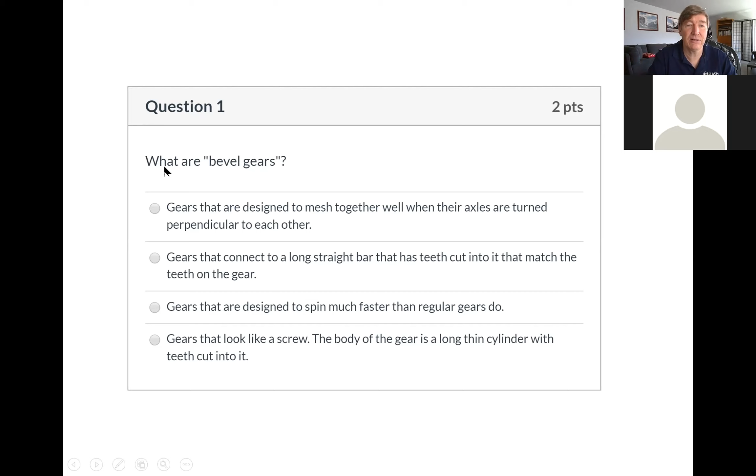Okay, so what are bevel gears? Well, hopefully you guys all remember what those are, because there's lots and lots of different types of gears. Bevel gears are the ones that look like this, so that the teeth are at an angle, so that when you take a bevel gear and mate it with another one that is turned 90 degrees, then the full teeth will contact the full teeth on this one. Because if you tried to do it using regular gears, it could work. I mean, you could have a regular gear that's like this and a regular gear like this, and they would work, but the teeth wouldn't interface completely. There would be only one little piece that would interface, and over time they would wear down very quickly. So bevel gears are definitely preferred to that. So I trust everybody got that one all right.

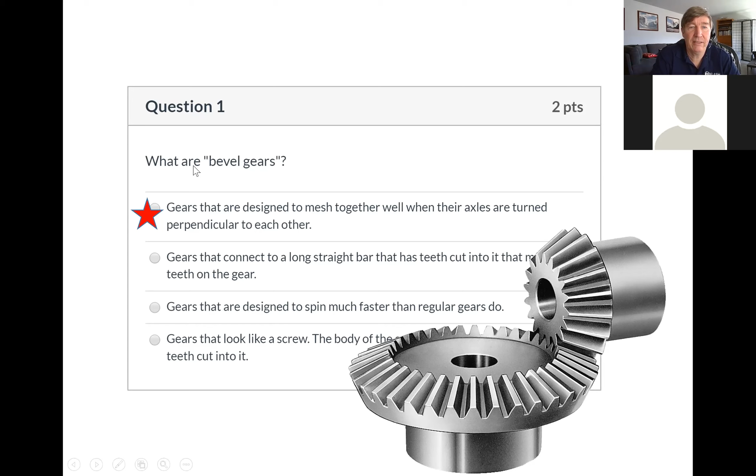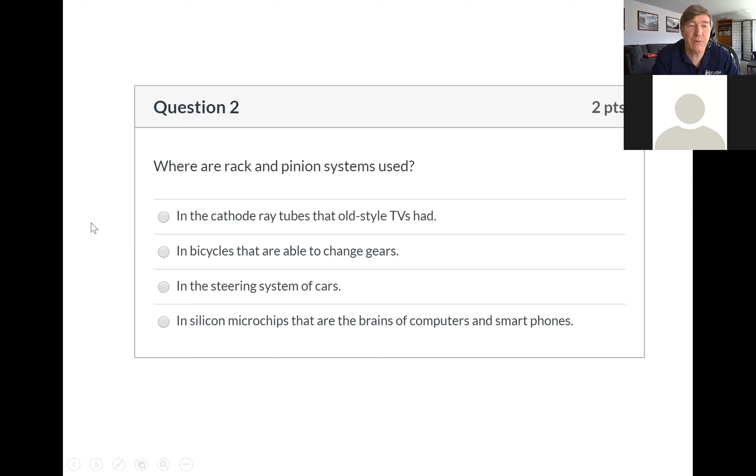Okay, rack and pinion. Okay, so I want you to think for a minute, what was a rack and pinion? Okay, hopefully you remember a rack and pinion is something that looks like this. Okay, so the rack is the bar that has teeth cut into it, and then the gear that interfaces with that is called a pinion gear.

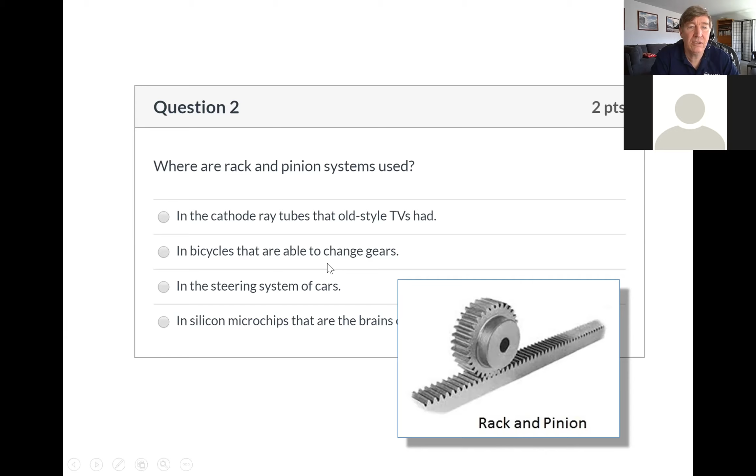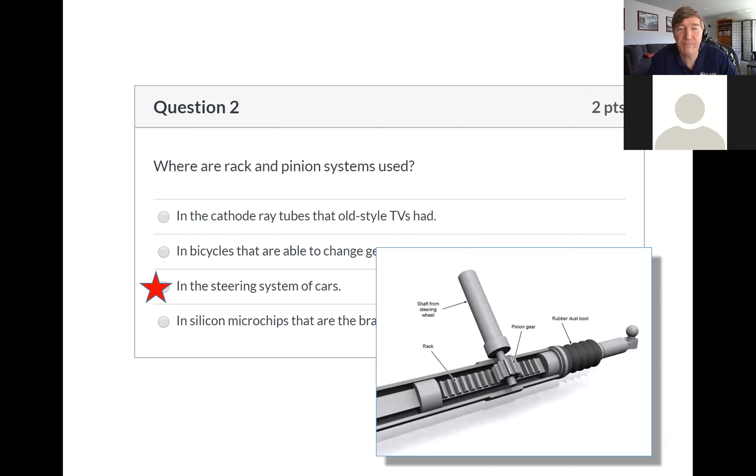Okay, so where are they used? Well, only one of them is applicable, and it's the steering for cars. And this is what a rack and pinion system looks like from an actual car. The first one that I gave you, this one up here, that's just a generic one. This is one that's designed specifically for cars. And this is how it works.

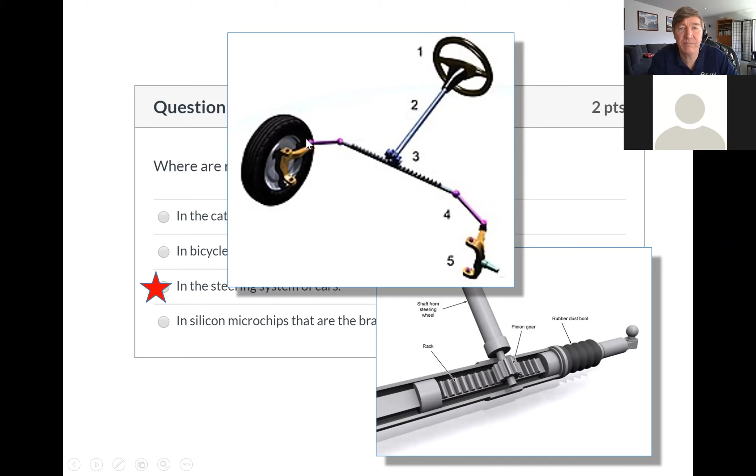Okay, so you've got the steering wheel, and then the shaft comes down, connected directly to the pinion gear. So when you turn the steering wheel, it pushes the rack, pushes it to the right or left, and that's connected to the wheels and causes the wheel to pivot. Okay, very efficient way of doing steering. Okay, what's the IMA of the gear train shown here?

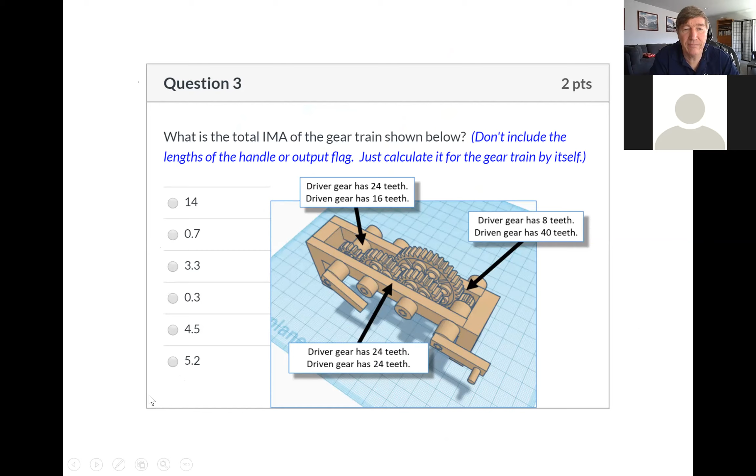Okay, so we got to remember how do you calculate IMA? The official definition we talked about before is the ratio of the two distances.

When we're defining DE and DR, if we were talking about a lever, it would be the distance from the pivot point to the place where the force acts. But you could also define it as the distance your hand moves divided by the distance the other thing moves. Danny is suggesting that the IMA is the inverse of what we had talked about before, because before we calculated the spin multiplier, but the force multiplier is the inverse of the spin multiplier.

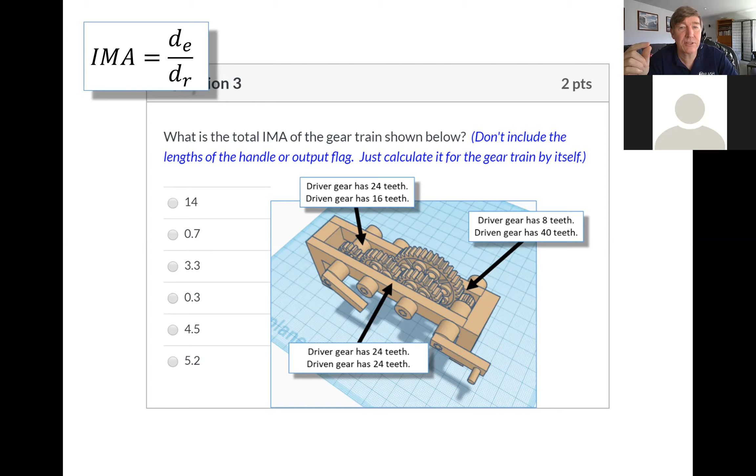What I recommend is that when we're talking about gears, instead of calculating the distances involved, calculate the number of turns. So focus your attention on just these two gears for right now.

This is the handle that we're going to spin. We want to ask ourselves, if this axle were to spin one full revolution, how many revolutions would the other axle turn? You can see on the driver axle, we have an 8-tooth gear. So one full revolution of the axle here is going to cause 8 teeth to move.

Now the driven gear over here is a much bigger gear, so 8 teeth on this guy is definitely not one full revolution, it's only a small fraction of a revolution. So if this guy is spinning one full revolution and this guy is spinning less, that's the same thing as if your hand is moving 5 feet but the thing you're trying to move only moves 1 foot.

That means your force is being multiplied. In this case it's the torque we're talking about, because this is gears and spinning. So the torque is going to be multiplied, meaning the torque on the second axle here is going to be greater than it was on the first axle. So now you know it's going to be the ratio of the teeth on one gear to the teeth on the other gear.

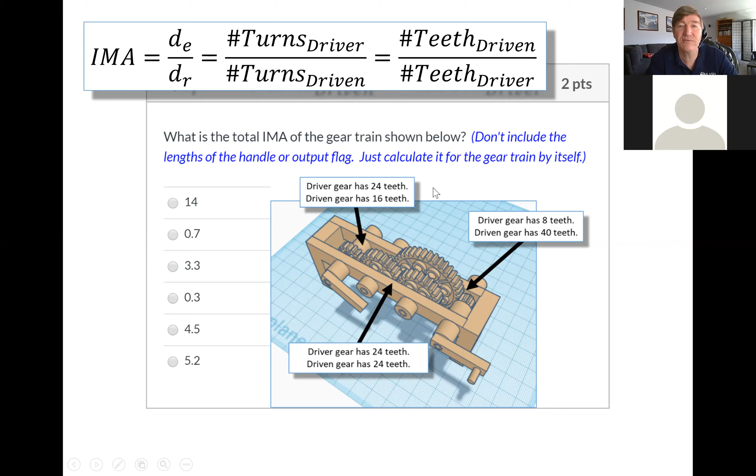So is it going to be the driven gear over the driver gear, or the driver gear over the driven gear? Well, since you know the torque is going to be multiplied, increased, just look at whichever gear has more teeth and divide by whichever has fewer teeth. In this case, the driven gear has 40, the driver has 8, so the ratio there is going to be 5. 40 over 8 is 5.

But that's just the ratio for that gear pair right there. Then we have to realize that this gear here is also on the same axle as that one. So this guy is no longer the driven gear, he is now the driver gear who is driving this gear. Now both of those gears have the same number of teeth, so the IMA for that one's going to be 1.

You might say, well why bother if it's only 1? Well, it serves a purpose, because sometimes the gears that you want to put here just don't fit. We wanted to put this tiny gear here, but if we tried that, maybe the axle would hit the big 40 gear. So the IMA for these two guys is going to be 1.

Now we look at the last pair. We've got a 24 tooth with a 16 tooth. So in that case, the driver gear is going to spin 1 full revolution, and the driven gear is going to spin more. So in this case, the IMA is going to be a number less than 1, not greater than 1.

So now that we know the IMA for each of the 3 pairs of gears, we just multiply them together to get the total IMA, and it works out to be 3.3. Danny is asking: 5 times 2/3 equals 10/3 for the IMA.

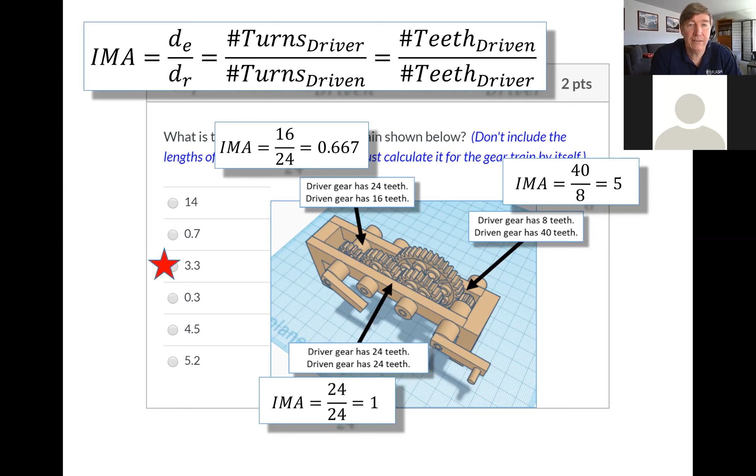Okay, question number 4 from the quiz, what's the IMA for this one? In this one, the simple machine is called a wedge. And again, the definition for IMA is always, you look at the distances. So what you want to do is take the distance that we move. If we push the thing vertically 9.1 inches, how far horizontally is that going to push? So all you have to do is take the ratio of the vertical distance over the horizontal distance, which is 9.1 divided by 10.8. It's always the distance you move divided by the distance the machine causes the object you're trying to move to travel. So in this case, our IMA works out to be a number less than 1.

So our force is not being increased by this machine. Our force is actually being decreased by this machine. But sometimes that's okay. Sometimes you're able to exert a very large vertical force, and all you want to do is redirect it, changing the direction of the force from vertical to horizontal. The fact that the output force from this machine is less than the input, a lot of times that's okay.

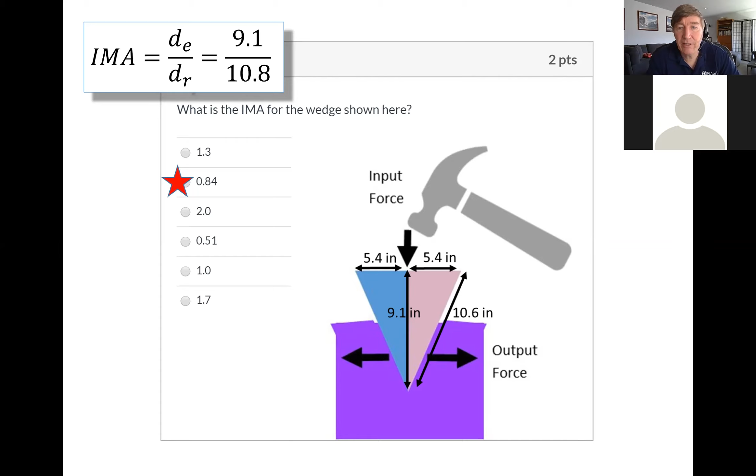Alright, I'm not seeing any more questions, so I'll keep on moving. Okay, the secret phrase, okay, we knew that one, mousetrap.

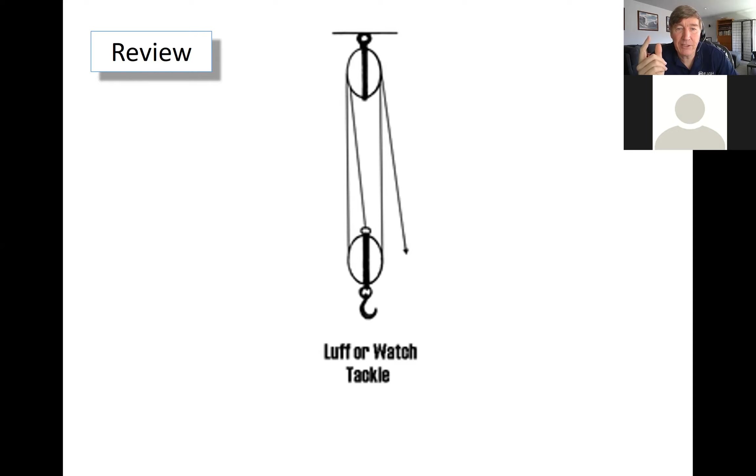Okay, so let's do a little bit more review here. Let me pick a couple other things. So here is a pulley system, and this is the exact same picture that I showed you before, but it wasn't the best picture. So what I did over the weekend was spend some time trying to find a picture that helps you understand better what's going on. So what you see now, this pulley system is the exact same pulley system as here. It's just that instead of looking at it from the side, now we've twisted it just a little bit so that you can get a better picture of what's going on.

Okay, so this is a block and tackle where the upper part here has 2 wheels that the ropes can go around, and the lower part only has 1 wheel. And in fact, I even found another picture that helps you understand better still. So this is a close-up view of the upper part of what I just showed you, and it's got all the names for it. Don't worry about it. If you were a sailor you'd need to know these names.

But for what we're going to do today, all you need to know is that this inner part here, this little roller, is where the rope is going to go. And in fact, here is an actual one. Now this guy only has 1 roller in it, whereas the thing you see on the screen has 2. So if you take the rope and put it over the roller and come down here, this is a simplified version of what you see in the picture.

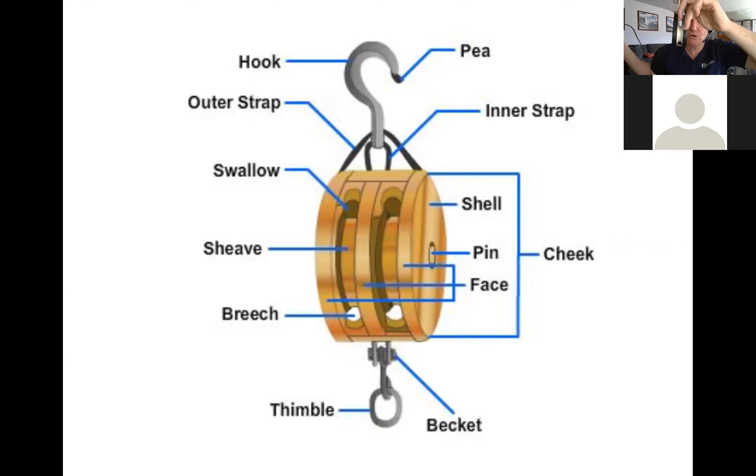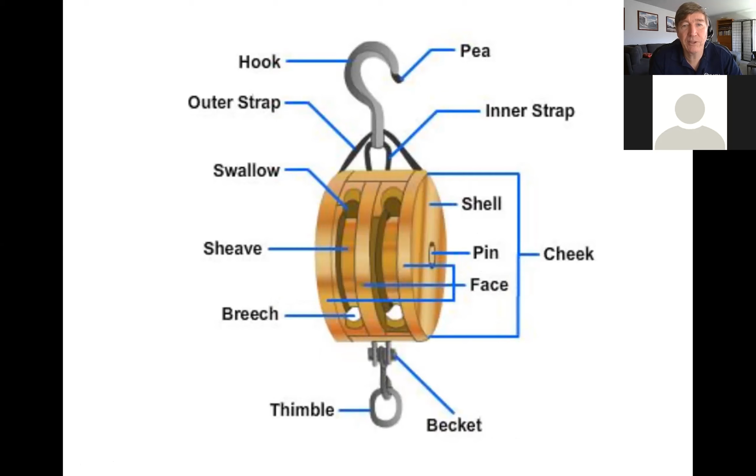So these rollers here are called sheaves. So the system that I showed you up here, this one where you've got 2 sheaves in the upper block and only 1 sheave in the lower block, now hopefully you understand a little bit better what's going on. So I want you guys to look at this and think, okay, what is the IMA of this block and tackle system, which, by the way, is called a luff tackle.

But again, that's just a trivia name. If you're a sailor, you need to know about this because sailors use this all the time, but I'm not going to require you to know this: a luff tackle.

Okay, so David is saying that the IMA is 3. Does anybody else want to chime in? Somebody agree with him, somebody disagree with him? I need at least one more response. Okay, so Van is agreeing with him, and in fact, I also agree with him.

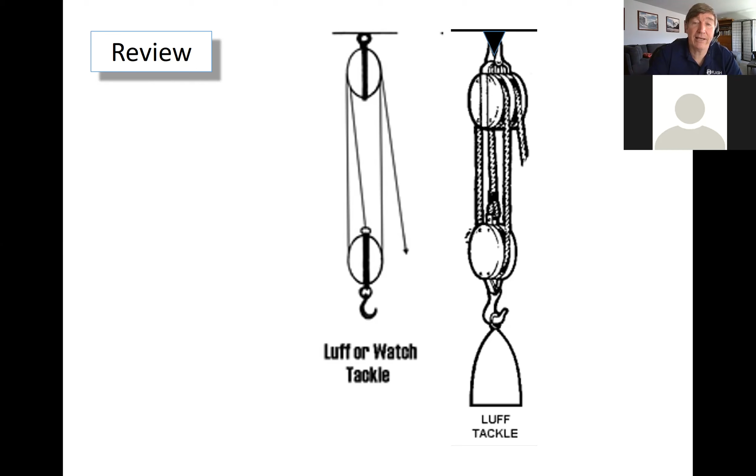Okay, so the IMA in this case is going to be 3, and the way that you know it—Danny's question is, how do you find it? Okay, I'm glad you asked. So the way you find it is you draw in your mind a little dotted box around the pulley that is attached to the weight that you're trying to lift.

So this what you see right here, that's the weight that we're trying to lift, and this is the block that's directly attached to that. And yes, David, you got it exactly right. Now all you do is just count the ropes.

Okay, so if you pull on a rope, we're going to make the assumption that the tension in the rope everywhere is the same. So if I pull on this part of the rope right here with a force of 10 pounds, we are going to assume that everywhere in the rope there is now a tension of 10 pounds. Now that assumption is only going to be true if our pulley system is completely frictionless.

But that's what IMA means, right? The I in IMA stands for ideal, which means frictionless. So if we pull with a force of 10 pounds, that puts a tension of 10 pounds everywhere in the rope, and we've wrapped the rope here so that we've got—can't count—we got three strands right here. Each one of those strands has a tension of 10 pounds in it.

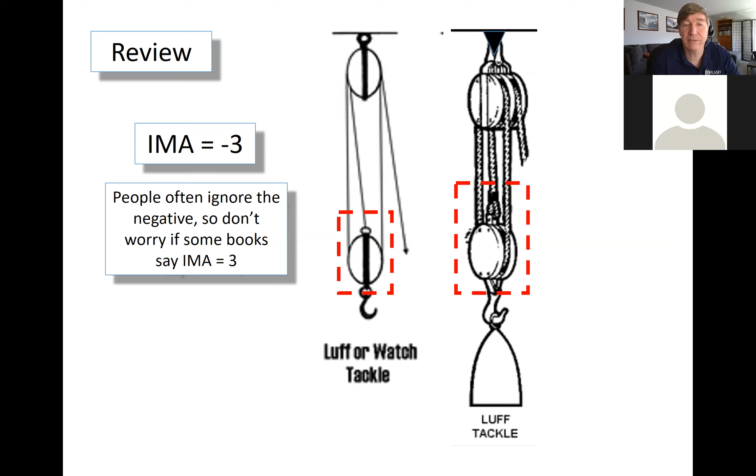Now here, what I've done is I've taken that exact same pulley system from before. So look on the right here—this is, we got two sheaves up here, one sheave down here. So it's the exact same physical pulley. What I've done is I've just flipped it upside down.

So the block here that only has one sheave in it, I've hooked it up to the ceiling, whereas before I had it hooked up to the weight. And then the block that has two sheaves in it, that's the one that I've now hooked up to the weight that I want to lift.

So if it's the exact same block and tackle system, and last time just a few seconds ago we calculated that the IMA of it was 3—if it's the exact same system, would the IMA not still be 3? I want you guys to think about it. What do you think, that the IMA is still 3, or maybe because we've hooked it up differently, the IMA might not be 3 anymore? So I need a couple people to type some in. How many of you vote that the IMA is still 3, and how many vote that it's different?

Okay, so I see one person is saying that it's 3, but looks like the majority of you are saying no, it's not 3 anymore, it's 4 now. Okay, and Sky is exactly right. Sky is saying if you use the box method, then you're going to find out that it's 4. So that's exactly what I'm going to do, what Sky suggested. I'm going to look at the block that is attached to the weight that we want to move, and I count the ropes, and I see that there's 4 ropes here, not 3. So the IMA is not going to be 3 anymore. The IMA is going to be 4.

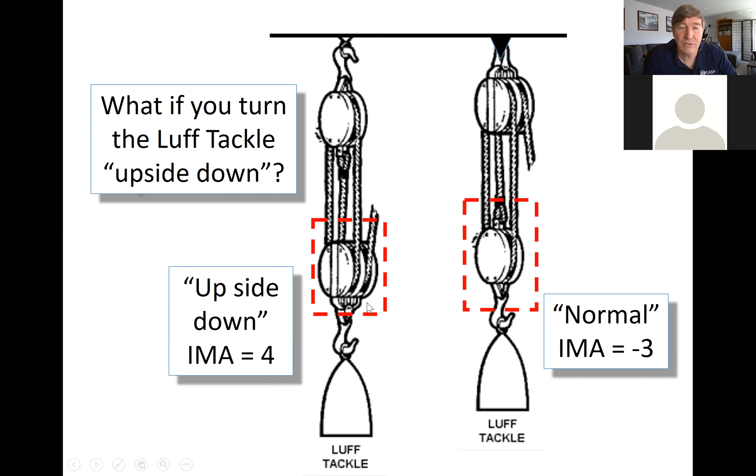So make sure you guys get good about how to calculate IMAs.

All right, now here is another pulley system, but this time my upper block has 3 sheaves, my lower block has 3 sheaves. Now, if you were a sailor, you would call this arrangement a threefold purchase, but you don't need to worry about that name. So use the dotted box method, count the ropes, and tell me what's the IMA of this pulley system.

Okay, so I see one person says 6, another one says -6. And so -6 is the more correct answer, but I would give you credit if you just said 6. Okay, so yes, the IMA for this case is going to be -6, but if you said 6, I'll give you credit, because most people don't worry too much about the direction, most people just worry about the magnitude of the IMA.

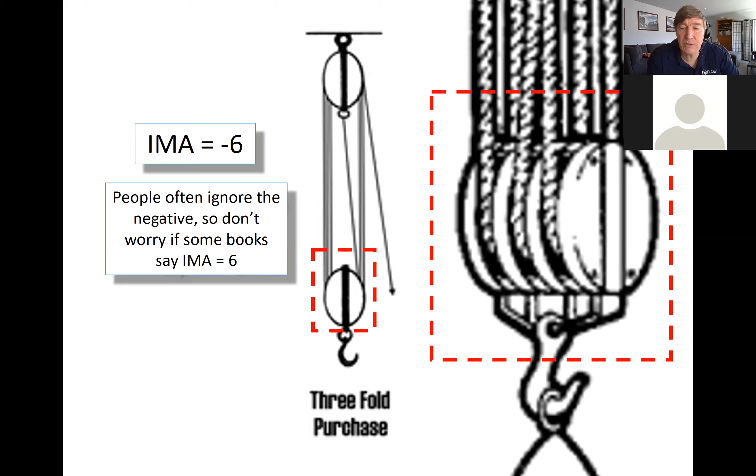Okay, so I'm trusting that you guys are now good with pulley systems. So let's move on to something else that might look like a pulley, but technically it's a different machine.

Anybody remember what the name of this particular simple machine is? I'll give you a minute to type something in. Well, yeah, I know, but this particular thing, okay, wheel, but you only got half of it, the other half is axle. This is when you take a wheel and an axle and you put them together, okay?

So what you do is the person working the machine, you grab onto these little handholds here, and you are going to pull the wheel, which has a large diameter. And this large diameter wheel is attached to an axle, which has a small diameter. So that allows you to pull up a heavy bucket full of water or whatever using a lot less force than you would have to if you just grabbed onto the rope and pulled it up.

So in this case with the wheel and axle, the IMA, if you look it up in books, some books will tell you to take the radius of the wheel divided by the radius of the axle, and other books say take the diameter of the wheel divided by the diameter of the axle. It's the same. And don't be surprised, some books say take the circumference of the wheel divided by the circumference of the axle. They all work out to be the same.

All right, so let's do an example like you might see in a quiz, wink wink, nudge nudge. Okay, so I've done diameters here. Okay, good, I see you're way ahead of me, I'm glad to see that. Okay, so the diameter of the wheel is 36 inches, the diameter of the axle is only 12.

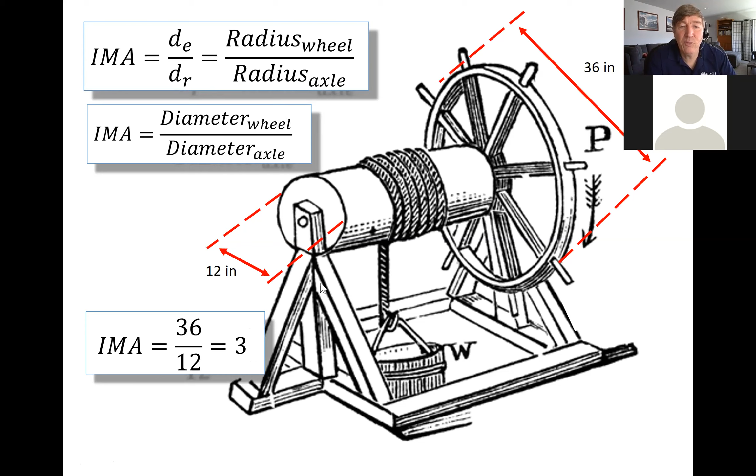So just take the ratio of those two, and that means the IMA of this particular machine is 3. So if we had a really big bucket with a lot of water in it, let's say it weighed 100 pounds, and we tried to pull the rope by hand straight up, that's more than we want to do. Hook it up to our wheel and axle, and we can lift that 100 pounds of water using a force of only 33 1/3 pounds.

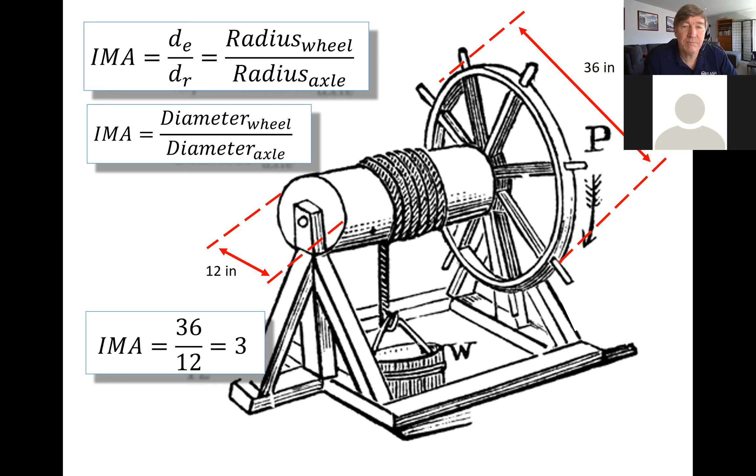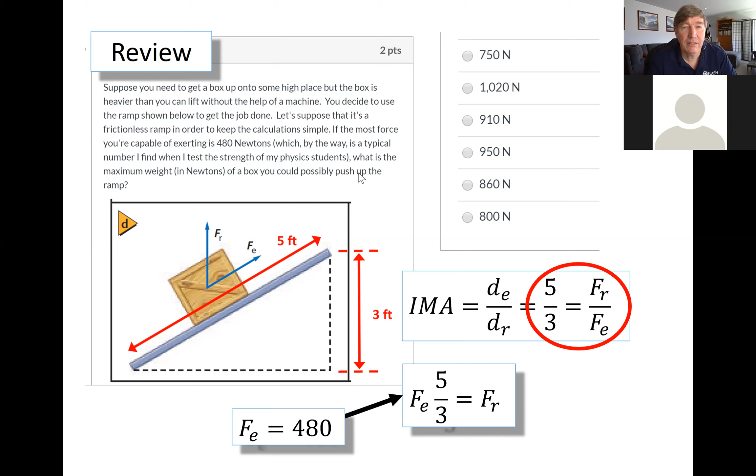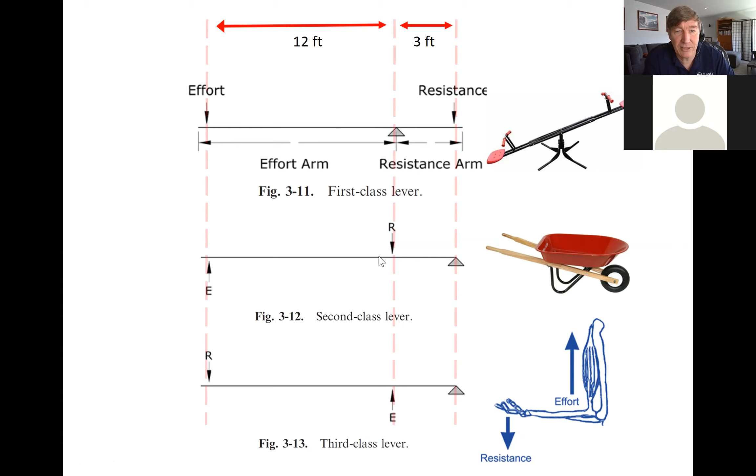Now, levers. Most people are pretty comfortable with levers, but you have to be careful because first-class levers and second-class levers behave a little differently. So let's suppose I give you a quiz here where I've defined these distances: this distance here is 12 feet, this distance here is 3 feet. Most people have no trouble if it's a first class lever. Remember first class, second class, third class.

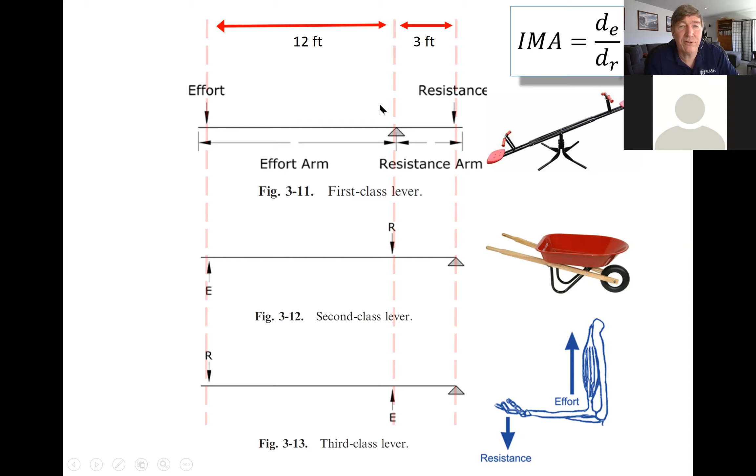Some of you probably already started typing. Just look at the first class lever only. What is the IMA of the first class lever going to be, the one on the top? Don't look at the others. I hear somebody saying 4. Looks like everybody agrees it's 4. If we look at the IMA, it's the effort arm over the resistance arm. The effort arm is 12, resistance arm is 3. Take the ratio of that, and yeah, I get the same number you guys got. You left off the minus, which is perfectly okay. I like to be 100% correct, but I would not mark you wrong if you said 4.

Now, what about the second class lever? This distance here is still 12 and this distance here is still 3. So would the IMA not still be 4, or would the IMA be something different? I see Eve says it's going to be 5 now.

And some of you are saying 1/4. And then, okay, now you said, wait, no. Okay, and so Sky says, let's go back to the definition here.

Sky is saying we take the distance of the effort force, which is the distance from where we apply our force to the fulcrum, and that distance is not 12 anymore. That distance is now 15. So by moving the fulcrum over here, we have changed the effort distance. It's no longer 12, it's now 15.

Now the resistance distance is still 3, to the right and to the left, so it's still 3. But the effort distance is now 15. So that means our IMA went from 4 to 5. Actually, -4 to -5, but I'm not going to worry too much about the negatives. So yeah, the IMA now is increased.

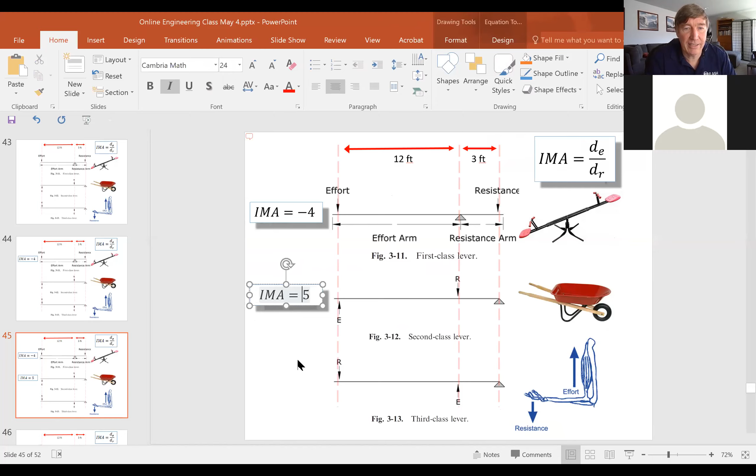Are you guys gonna make me wear the wig because of that? Okay, yeah, let's see, the wig's in the other room. Hang on a sec, I'll go get the wig. I deserve it. Hang on a sec while I go get it.

Okay. Oops, I have to put this on first and the wig second, otherwise it doesn't work too well. Okay. All right, yeah, I earned it. I deserve it.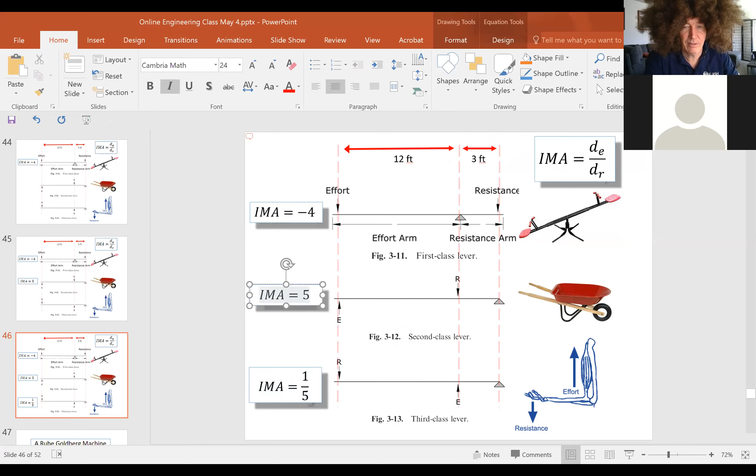Okay, gotcha. Anyway, okay, now, all right, so how about the third class lever? All right, the third class lever also should not be a minus. Oops, let me go back up here. Hang on a sec, let me fix that, and I also got a copy of it up here.

Okay, so there we go. So the third class lever, our IMA is a number less than 1. So with the third class lever, it's not increasing our force, it's actually decreasing the force. But the advantage is that it's increasing the distance that the end of this thing moves.

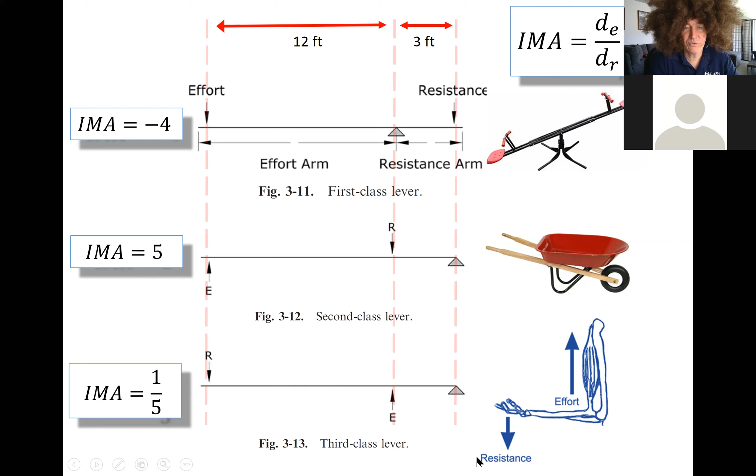So if you look over at our arm here, you can see our bicep, which is a lot stronger than people realize, but it can only move over a short distance. So the bicep allows the hand to move a big distance. Third class levers are in fact very useful. He's strong. Okay, all right.

Okay, now let's get back to talking about the Rube Goldberg machine that I want you guys to design and build and take a video of, and I want you to submit the video. Now here is the requirement: 3 of the elements in your Rube Goldberg machine need to be simple machines that you can calculate the IMA for, and you need to actually calculate the IMA.

Okay, so let's look at my example Rube Goldberg machine right here. Notice that they've put numbers on each of the elements, which is something I want you to do too. So element A is an alarm clock. When the alarm clock rings, it starts vibrating. Well, kind of hard to calculate the IMA for that one.

Now it's okay for you to include elements in your Rube Goldberg machine that don't have easily calculatable IMAs. It's okay to use them, but 3 of them have to be ones that you can. So the alarm clock here is perfectly valid to include, even though we can't really calculate the IMA.

So the second one is we got this little ball here, and when the table gets vibrated because of the alarm clock, it falls off into here. Again, that's one you can't really calculate an IMA for. So element B, okay to include, but you just no IMA.

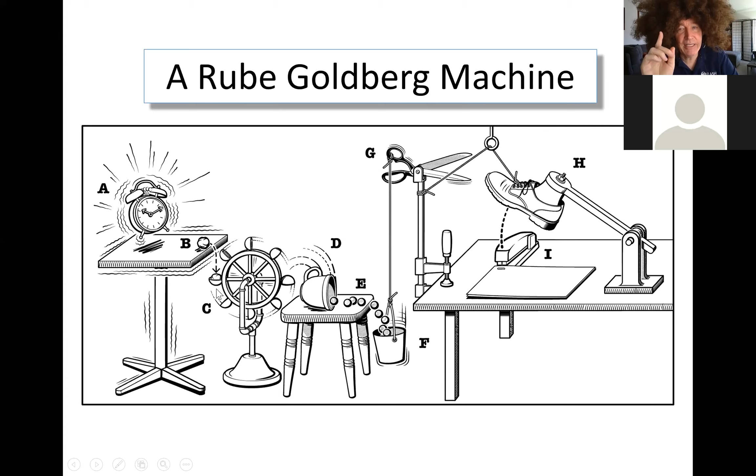Now, when we get to element C, here we have one that we could calculate an IMA for. Let's see how. It's a wheel, which in this case is really acting like a lever. When the ball falls into the cup, that exerts a downward force, which causes the upside-down cup on the other side to move up. So this wheel is actually performing the function of a simple lever. And hey, that's something we can calculate an IMA for.

And so I want you to do it. In this case, what we're going to do is look at the distance from the fulcrum to where the force is exerted, which I'm just kind of making up — I'm assuming 6 inches. Then we calculate the distance from the fulcrum to where the output force is exerted, which in this case is also 6 inches. So our IMA here is -1. Now if you wanted to call it +1, I'd be okay with that. So bingo, this is one of the 3 elements in my machine.

Now your machine is going to be different. All right, so I've calculated the IMA for one of my elements. Good, I've satisfied 1 out of the 3. All right, so let's continue on here.

So in this thing, when this little cup flips up, it knocks over the cup, and the ball comes out. I'm thinking, I don't know how I'd calculate the IMA for that. Then the ball comes over here and rolls off into there. Again, kind of hard to calculate an IMA for.

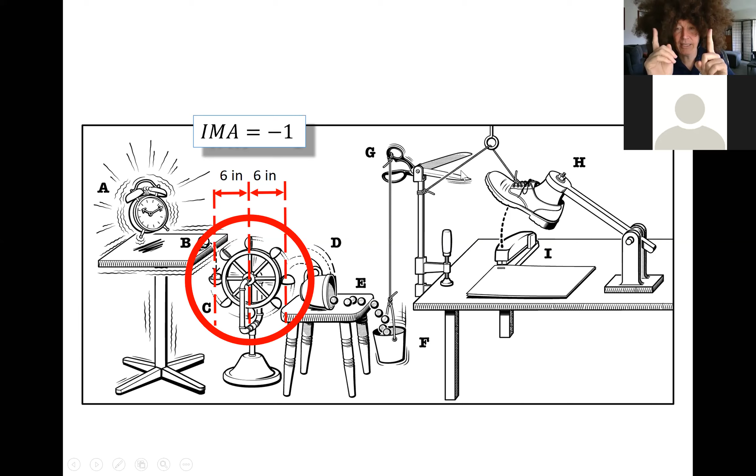But now, once we get a weight in the cup, that weight is going to pull down on this end of the scissors, which is going to cause the other end to come up and cut the string. Hey, I'm thinking we can calculate the IMA for that. All right, so let's focus our attention over there.

Again, we have just a simple lever, a first-class lever. Supposing the distance from the pivot point to where we tie the string on is 2 inches, and supposing the distance from the pivot point to where the string gets cut is 7 inches, then we say, okay, I know how to calculate the IMA for that. That would be an IMA of 2/7, which is a number less than 1. So in this case, we're not increasing the force, we're decreasing it, but that's okay. That's a valid machine. So the IMA for this guy is going to be -2/7.

So good, now I've calculated the IMA for 2 of the elements in my Rube Goldberg machine. I just got to go one more. All right, let's see how I could go one more.

Okay, so when the string gets cut, the shoe falls. Now, if the shoe were to fall at the end of the stapler, the effort force is the shoe falling, and the output force is the stapler stapling. Both of them are going to be the same distance from the pivot point right here. I hope you guys can see where I've got my cursor moving. So in this case, again, my IMA is going to be the effort distance over the resistance distance, which is going to be 1. So again, I have another IMA of just 1.

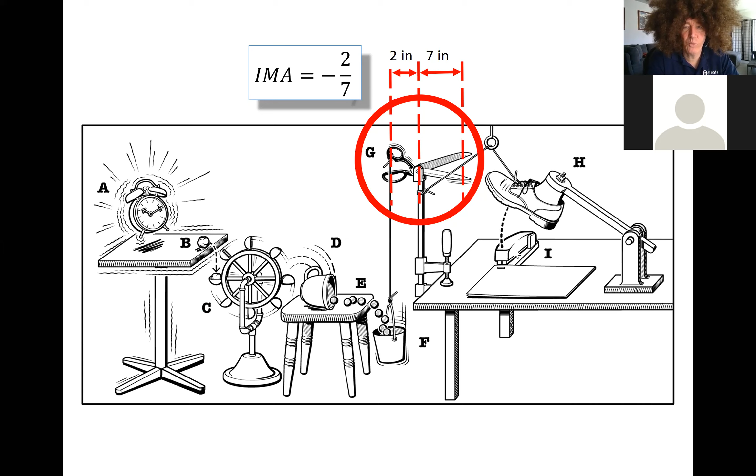And so in that case, you'd say, well, that's kind of boring. Maybe boring, yes, but still valid. Now, the picture here makes it look to me like that's what's happening — it looks like the shoe is hitting right at the end. So if that's the case, the IMA is 1.

Now, if I wanted to make it a little more interesting, I could arrange things so that the shoe doesn't hit at the end of the stapler, but instead hits at the middle. Now, that's not what it looks like is happening here, but if I wanted to make it more interesting, I could make it that way. And so in that case, my IMA would be 1/2 rather than 1.

All right, so I've got the 3 elements of my Rube Goldberg machine, which I calculated the IMAs for. So I have satisfied the IMA portion of the Rube Goldberg assignment. Now, I would hope that in your Rube Goldberg machines, you have more than just 3 elements. In fact, let me rephrase that.

I will require that in your Rube Goldberg machine, you have more than 3 elements. I'm not going to put an upper limit on the number, but don't go too crazy on this. I don't want you to spend unbelievable amounts of time, like 50 hours making a Rube Goldberg machine. That's too much. I'm not going to give extra credit for making a super... or will I? I don't know.

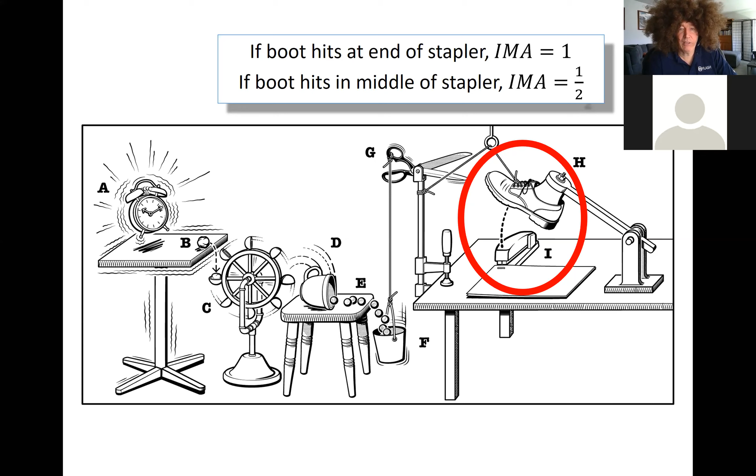Okay, I think we've clearly defined everything, so I'll call it good here. Here's what I said before in writing: 3 of your elements must be ones for which you can calculate IMAs. By this coming Wednesday I want you to tell me what those 3 elements are, show me drawings of them - you don't have to have built them yet, just drawings - and I need to know what you calculated the IMAs to be.

Dan is asking, are we allowed to incorporate electronics into our machines? Yes, that would be great. I would enthusiastically encourage that. Yes.

Are there any other questions? Don't forget to take the daily quiz for today. The quiz will give you a couple of simple machines and ask you to calculate the IMAs for those machines, so it should be relatively straightforward.

Luke is saying for levers, wouldn't the IMA be slightly less because of the angles with the lever rotating around the fulcrum? Yeah Luke, you are correct. But that's a bit more complex than I want to get into. Remember, when you're exerting a torque, the actual torque is not just force times distance, it's force times distance times the sine of the angle. So you're correct, but I don't want to go to that level of complexity.

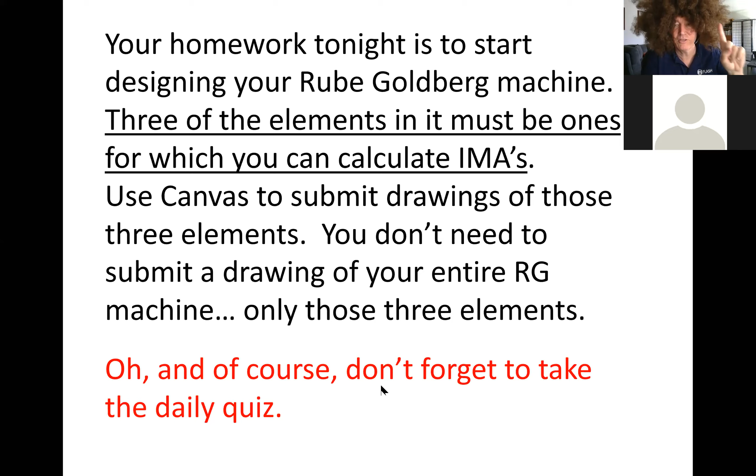Again, the birds are fake - I have no idea what birds you're talking about. Okay, going once, going twice, sold.